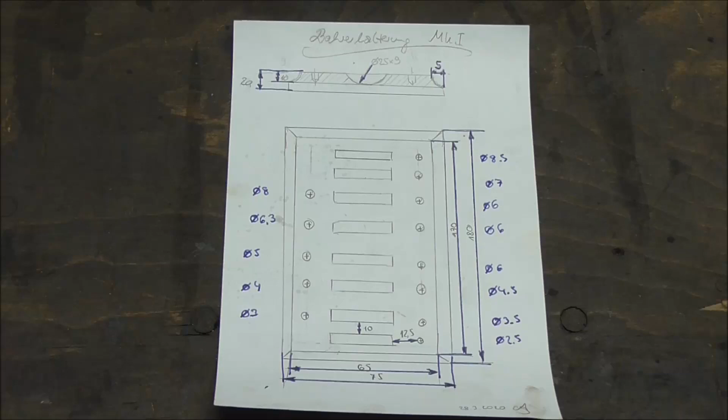It is time to tackle a project which has been long overdue. I'm talking about a holder for center drills, dies and taps.

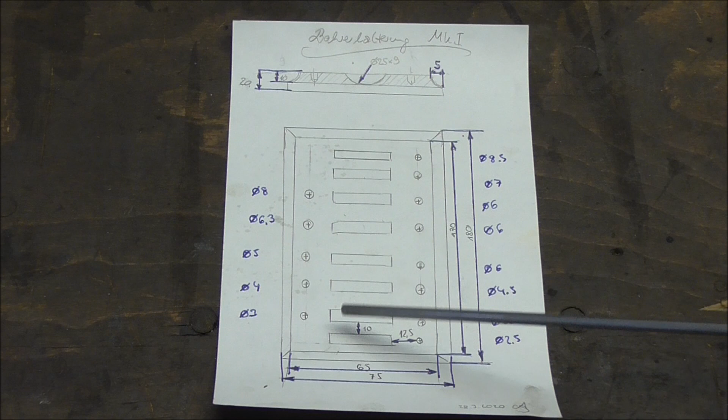There are two main reasons. First, it's very inconvenient to always reach for the drawer, open it, search for the part you need, put it back, and so on. A holder that's always on the tabletop is much more convenient. Secondly, my taps and dies are everywhere around the shop.

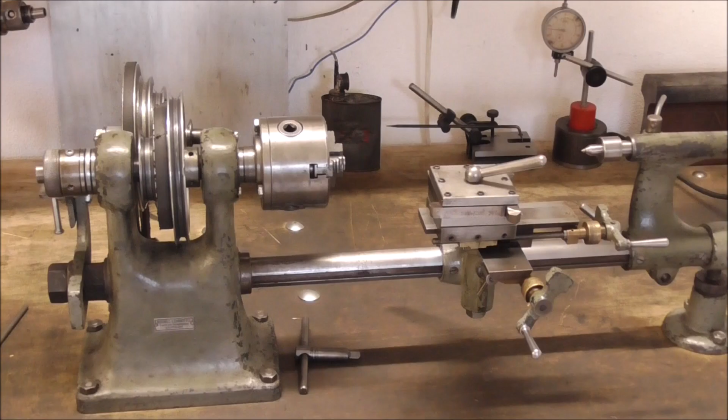Here is my lathe, and down here, in this near-bottom drawer, are my center drills, and in here are my dies. You can see it barely fits a finger in here. Talk about convenience. To open this, I have to assemble my die holder and search for my die.

Put it back where it belonged, and now imagine I wanted to tap a hole. I would need to walk way over there and open this drawer here. Here is where I keep my taps, and you may notice there are also a set of dies over here and some easy outs on the side.

This is my very first set, which I bought for something like 35 euros, and to be honest, none of these taps actually worked. You can see the silver ones here - these are proper taps, which I bought for probably the price of all of this thing. The dies are just rubbish.

I only keep this M2 and this M3, I think, just because the space is there. But imagine, I won't be needing all of the golden taps you can see. The easy outs are crap, all these dies are crap. Basically, this is a huge waste of space. If this suitcase wasn't here, I'd have an entire new drawer where I could put more stuff.

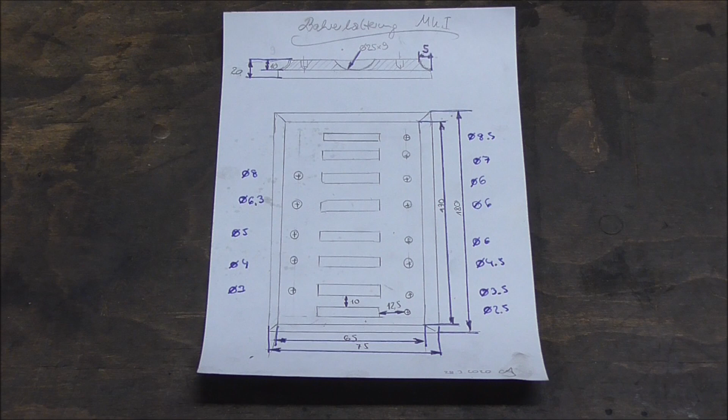After having responsibly disposed of all the tools of inferior quality, here is what natural selection has left over.

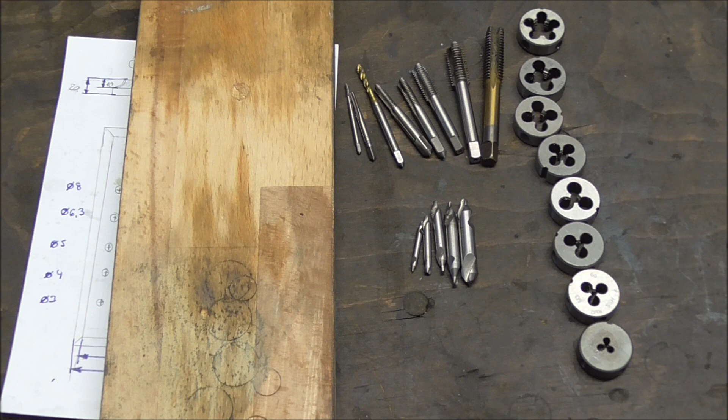I'll make the base out of wood, leftovers from when I built my living room table. And I'll keep true to the philosophy I used there, which is to work mostly with hand tools. As a metal worker, at least, I think wood is such a nice and soft material to work with, it's a pleasure to use hand-driven tools on it.

Step 1, of course, cutting off the blank. I'll be using my granddad's wood saw for this, which is unfortunately incredibly dull at the moment. So first we'll have to resharpen the blade, and for that I'll also have to set the teeth. Luckily, I own just the tool for the job.

This is a pair of vintage setting pliers, which I acquired from the shop I got all my steam engines from, shortly before it closed down forever, sadly.

What's especially important with hand tools in woodworking is their sharpness, and with a saw blade, also its smoothness. So I took sanding paper and took all the surface rust off here - look how much there was on here, it didn't look that dirty, right? There's no need to go full mechanic on this, it's enough to have it feel smooth without any rough rust. It doesn't need to be 100% shiny, this is plenty good enough.

So now we can start sharpening it.

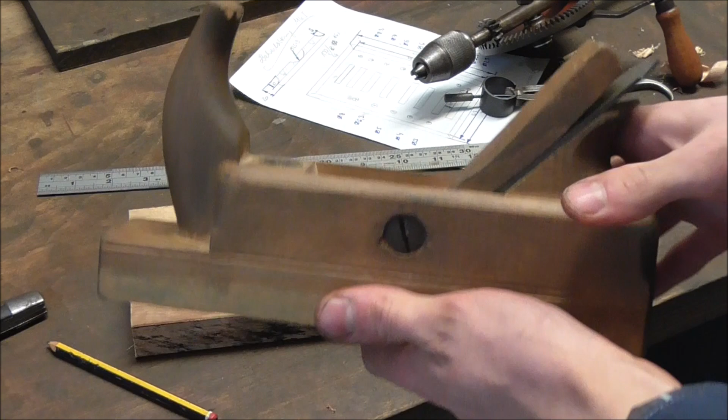Now that might seem insane, but with a sharp, nicely polished blade you can hog materials so fast and get such a nice surface finish, it's incredible. So I'm not afraid of taking this down like 7 millimeters or so until it looks nice.

Drilling the side holes to mount all the taps and center drills is going to be straightforward. What's not that straightforward is getting the V-shaped groove in here where the dies will sit. What I'm going to do is take a drill and go in at an angle to establish the V-shape, and then clean the rest out with a chisel, which will hopefully look acceptable.

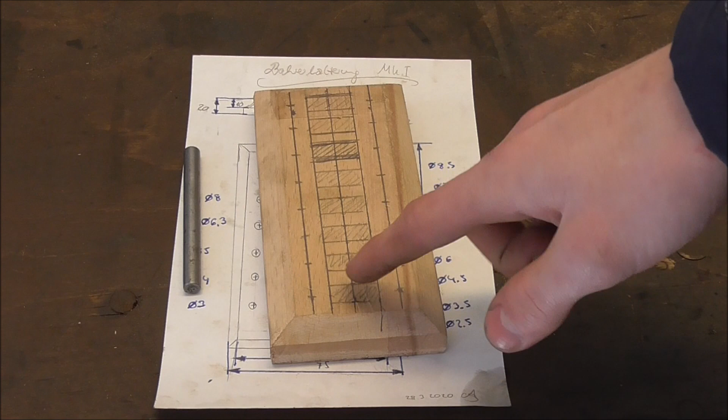You may notice we're back to square 1.5 here. I kind of scrapped the part when I tried chiseling these middle sections out. I should have known this wasn't going to work, because whenever you chisel a gate somewhere you need a saw cut on either side to keep things from breaking out, and especially because I worked across the grain, I pretty much busted the entire thing apart.

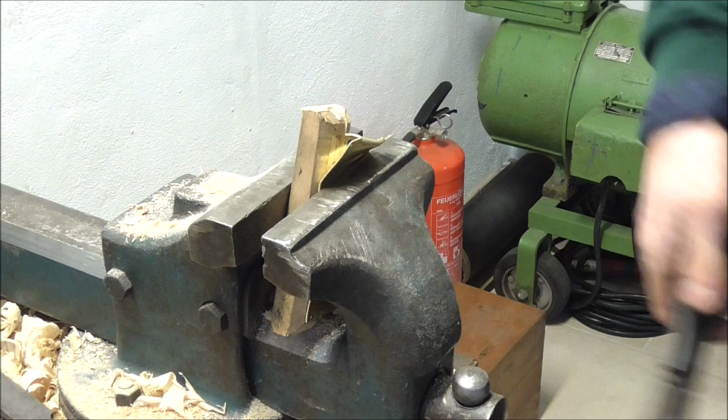I then tried chiseling an entire groove into the middle and covering it up with a quickly made sheet of brass. Then I tried to nail the brass into place and the nails broke, and when I busted the nails while trying to punch out the existing nails, I kind of lost it and punched the thing to pieces.

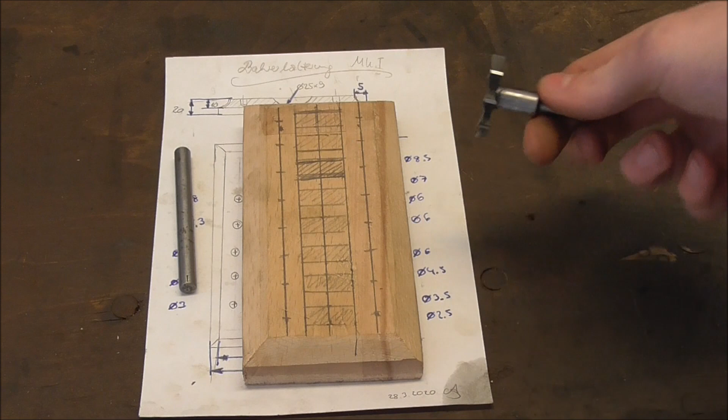So yeah, I quickly made this new one here, nothing different from the old one, and we're now going to make ourselves a cutter of this type, sort of like a Woodruff key cutter or T-slot mill, and we're going to try and get the radii into here like that. It's going to have a rather long stick-out so that I can get into the pieces in the middle as well, and I think that's giving us a lot better chance to succeed.

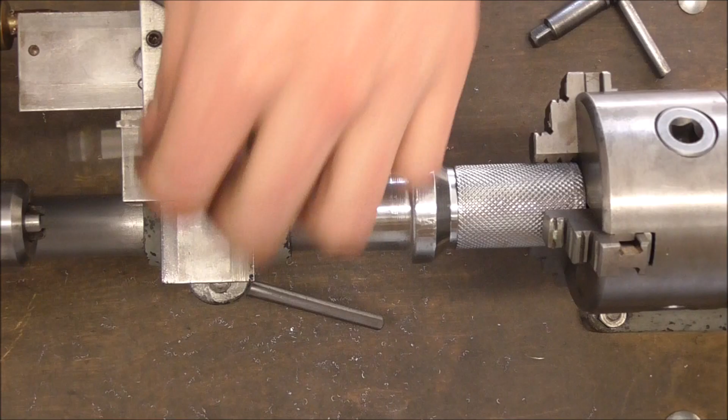Now I know I'm kind of violating my own no power tools rule here, but see it this way, we're not working on wood here.

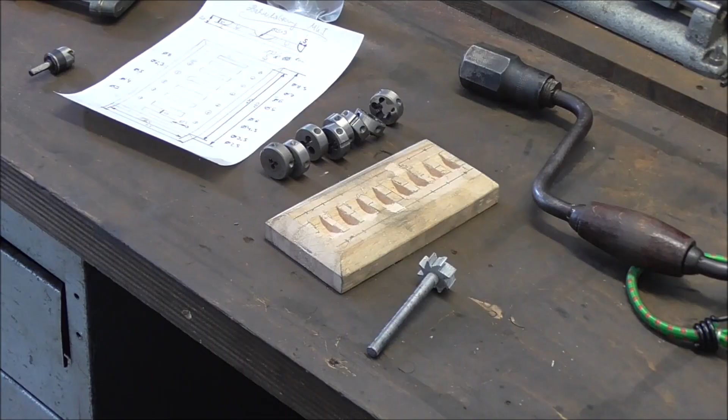So I had to break the no power tools rule completely there. It would have just taken far too much pressure to do this by hand.

I was going to show you a neat old trick from my granddad with a bit and brace, where you would chuck this thing up, hold that against your breast, and then take one of these securing bands, you know, for luggage and stuff, put it around your leg like so, and that would create the necessary downward pressure to be able to mill in here.

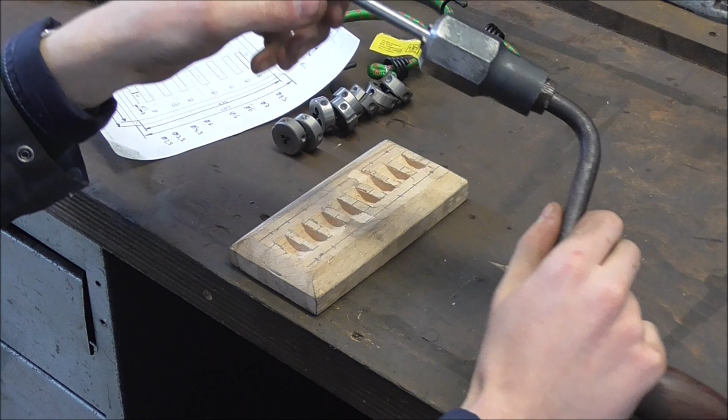However, as you can already see, the cutter has a very strong tendency to just walk off. This would work for the small carbide burrs you'd use to deburr stuff, or on a die grinder for example, but this is just far too aggressive a profile, so even with the lathe I slipped here and there, and I'm hoping this one's going to polish out, and this one is right where I'll need to drill a hole for a tap, so it might just vanish.

And then of course, if you put all the dies in here, the surface finish inside isn't really important, so this works out fine. Next thing will be drilling the holes, and I promise you I'll do that by hand.

It's curious, you know. The top on this radio I did with the very same varnish that I did this with, and well, the radio looks good, and this thing just looks like it's been in the fire too long. It's interesting how different wood reacts, and also frustrating.

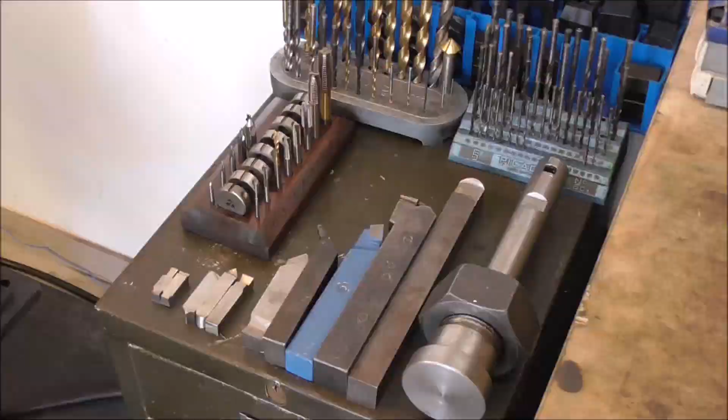Okay, here it is. You can see, despite the imperfections, it actually looks quite nice, and for what it is, I think it's going to work just right.

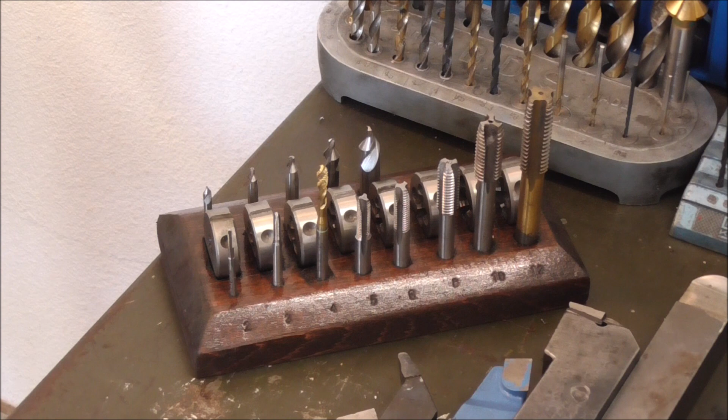You can see it sitting here with my other drill holders and racks of stuff, and it fits in here perfectly. So yeah, hope you enjoyed the little different project, and thank you all for watching.